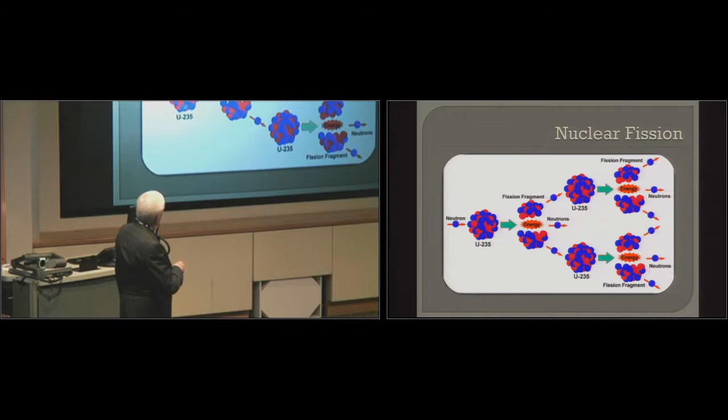And so when you talk about nuclear waste and concerns, some of these fission fragments are radioactive. So when you have a fresh fuel pellet, you can hold it in your hand. It's not a problem. But after it's been in your reactor for about 3 to 4 years, you would not want to hold it in your hand, because some of these fission fragments are radioactive and they have to be handled very carefully. So basically the chain reaction, you start with uranium-235, hit it with a neutron, it splits, that neutron goes off to others, and so the chain reaction is self-sustaining.

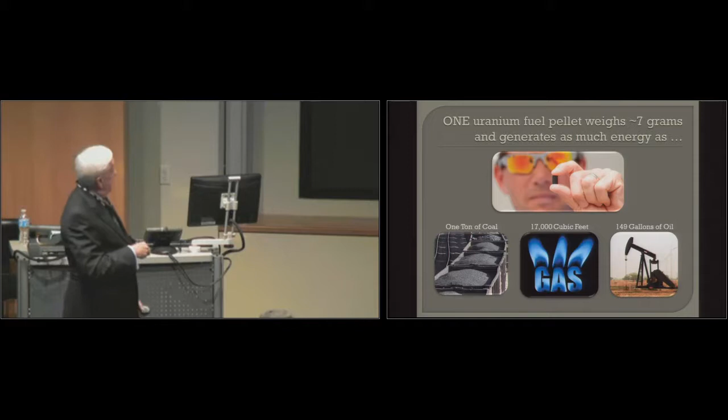So the way this works is you'll take a little fuel pellet, it's about half an inch in height, about half an inch in diameter, ceramic uranium dioxide fuel, enriched to about 3 to 4% uranium-235. And the amount of energy in that little pellet is fairly phenomenal. It's equivalent to a ton of coal, or 17,000 cubic feet of gas, or 149 gallons of oil. So it's a very compact form of energy, very efficient.

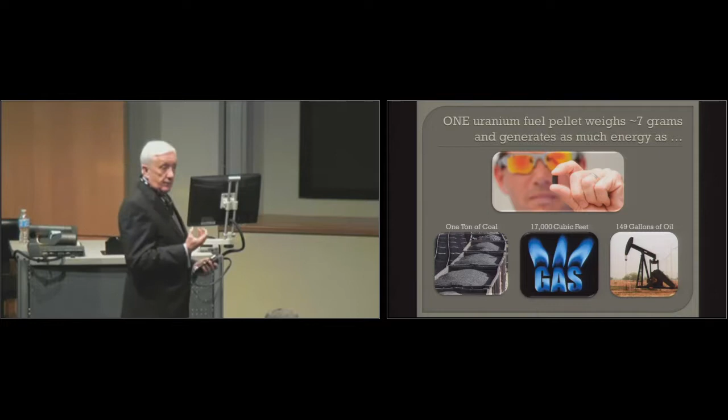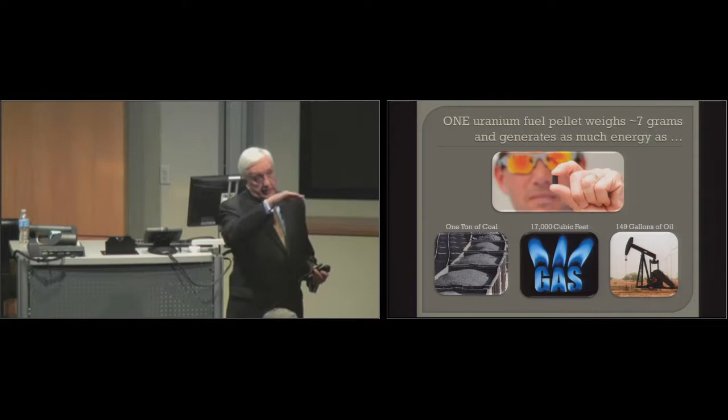Because what you're doing is you're dealing with the nuclear forces rather than if you burn something. If you burn something, whether it's coal, oil, or gas, you're dealing with the electron clouds, and those are weaker. So if you look at forming a CO2 molecule, you'll get roughly 2 electron volts when you form CO2. If you split your friendly atom of uranium, you get 200 mega electron volts. So that means you get 100 million times the amount of energy from that fission reaction than from burning something, because you're dealing with the stronger nuclear forces. So that's why it's such a compact form.

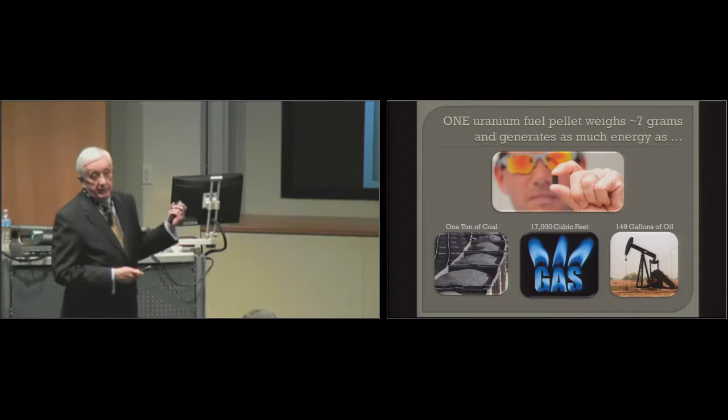Now there's people like Dave and I that think reactors are fun, but you really do it because they're energy efficient, and in general, until we had very cheap natural gas, they were economically advantageous. So I gave a talk a number of years ago in Dallas. That pellet is also equivalent to about 50 gallons of gasoline. And so the student held up his hand and said, well, if I put that little pellet in my car, can I drive it around? It doesn't work that way. You've got to go through a conversion process.

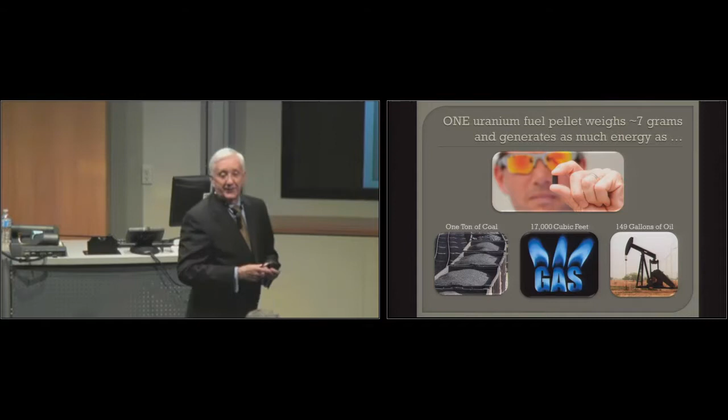So these little pellets just simply stack up in a long rod, and this rod then goes into what's called the fuel bundle. So during the fissioning process, this pellet gets hot because of the slowing down of the fission fragments and converting mass into energy. This rod gets hot, and so all you do is you flow water by it, and the water gets hot. So all a nuclear reactor does is makes hot water. It makes a lot of hot water.

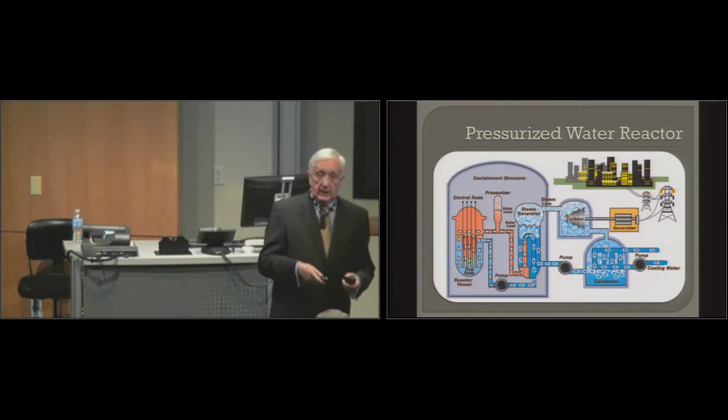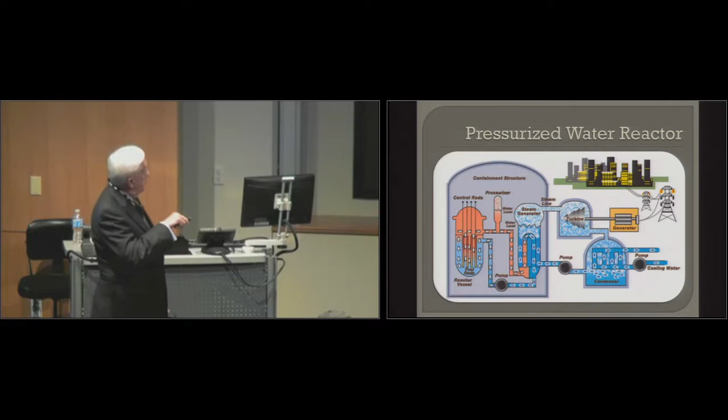And so we typically have 2 different kinds of reactors in the world. The main one is called the pressurized water reactor. And this really spun out of the Navy nuclear program. That's why it sort of started a little bit faster than the boiling water reactor. So in the United States, 2/3 of our reactors are pressurized water reactors. And this reactor has 3 distinct loops affiliated with it. So in this area, the primary loop stays liquid all the time.

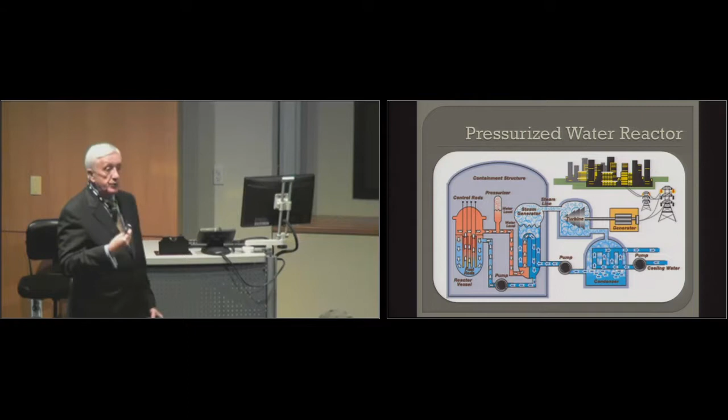And so the water goes by the rods, it gets hot, it comes out, it goes through a steam generator, and in this second loop is where you turn water into steam, and then that steam then goes through a turbine. So you'll have 3 different loops. So the water that stays here all the time, it just goes around and around. Then you'll have the secondary steam loop, and that water is closed, goes around and around.

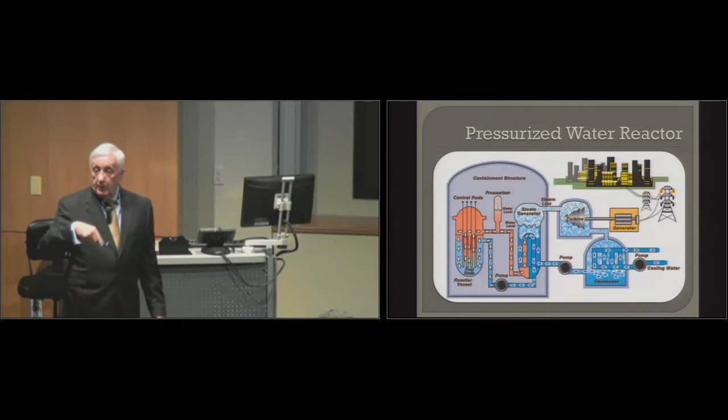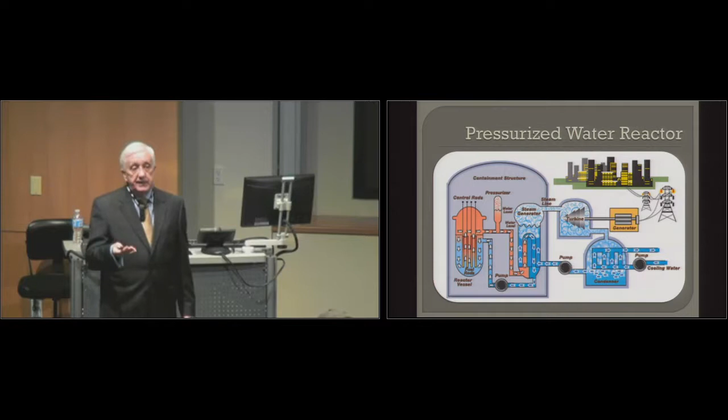And then your third loop is the cooling water. So you'll either have a cooling tower, a lake, a river, or something like that condenses that steam back into liquid and it circulates around. So it's a very basic type of reactor, and that really came out of the nuclear Navy program and was commercialized. The other kind of reactor is a boiling water reactor, and this is the kind that was at Fukushima.

And it doesn't mean that boiling water reactors are inherently unsafe. It just means that this particular reactor at Fukushima was a boiling water reactor. In this one, you only have 2 loops. The vessel is taller, and so you'll actually make steam at the top. You'll have steam separators, so the water droplets are filtered out, and that steam then goes through the turbine. Again, it's condensed down and comes back in.

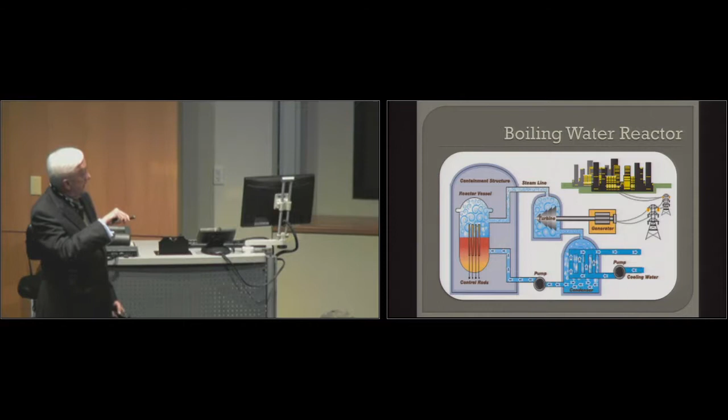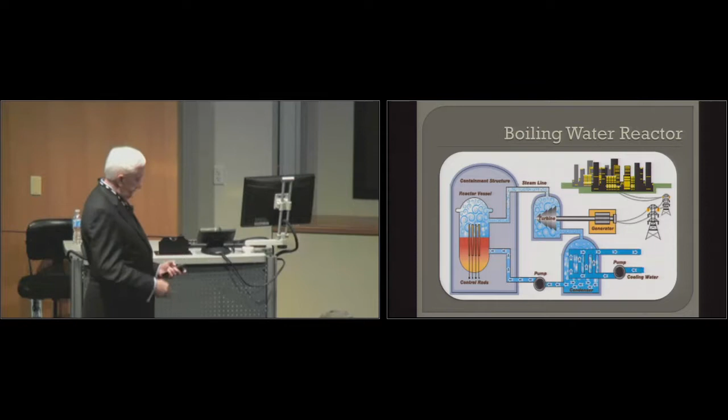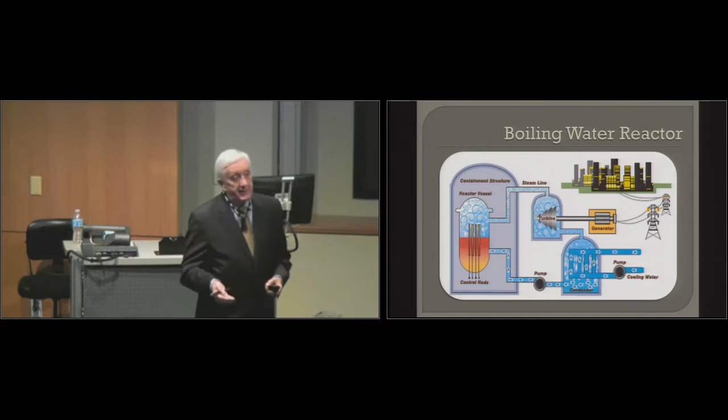So that one will be a 2-loop plant versus a 3-loop plant, but you'll actually convert the steam inside of it. The vessel is about twice as high as in a pressurized water reactor, but they're essentially the same concept. Some people would say which one was better. I used to say, well, it's like a Ford or a Chevrolet. Would you rather have a Ford or a Chevrolet? So, they're similar. Now you have to say a Mercedes or a BMW because the costs have gone up so high. So we have to use a different analogy now.

So if you look at around the world and you say, well, why would anyone want to build a nuclear plant? And usually there's a variety of reasons. One is diversity. You don't want to have all your electricity from a single source, no matter what that source is, whether it's gas, whether it's coal, whether it's oil, whether it's nuclear, whether it's hydro. You want energy diversity. The other thing is they build nuclear plants because they are sustainable.

There are tons and tons of uranium around. So if we took all the uranium that we know today, you could run all the nuclear plants for their entire lifetime with no problem. And that's at a very low uranium cost. If the uranium cost goes up, then your supply goes up. So it's very sustainable. In addition, you could also build a breeder reactor where you actually make fuel as you burn the fuel.

So if you look at the fission from a uranium-235, you get, on average, 2.5 neutrons. That doesn't mean that you have a half a neutron. Sometimes you have 2, sometimes you have 3. You only need one of those to keep that chain reaction going. So you could take that other, on average, 1.5 neutrons, and you can convert a fertile fuel to a fissile fuel. And that could be either thorium or uranium-238 to make plutonium.

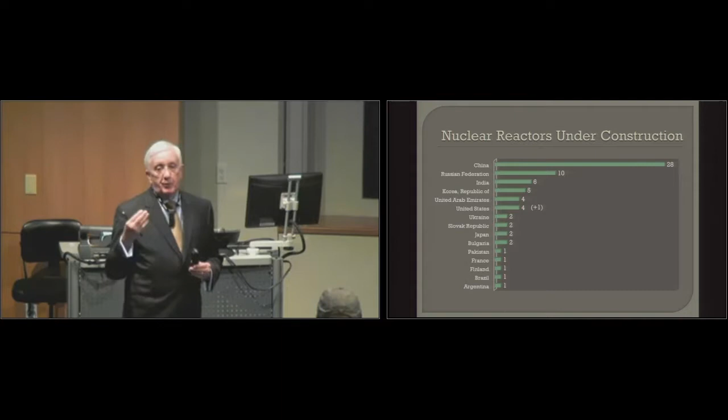What about the AP1000s that the Chinese are building? That's going to be interesting. I don't know the financials. The question was, what about the 4 AP1000s that China is building? So China has an agreement with Westinghouse to build 4 with an option for another 4, so they're going to be building 8 in reality. Now, the thing that was interesting, when that contract was done, everyone knew that the intellectual property rights would be borrowed by the Chinese over time.

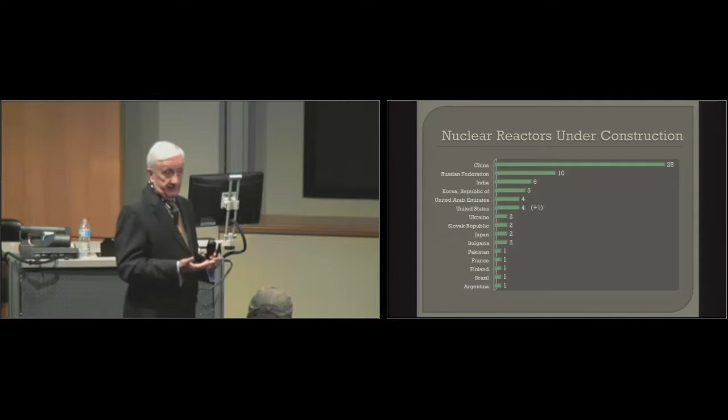So the Chinese now plan to do a CP 1400. They want to kick the megawatts up from roughly 1,000 to 1,400 megawatts; it's actually a little higher than that. But what's interesting is Westinghouse first designed the AP 600, which is passively safe, which means if your pumps shut off and you lose all kinds of power, it's not going to melt. The margin of economics was borderline, so they kicked it up to 1,000. They reduced their safety margin, but it's still passively safe.

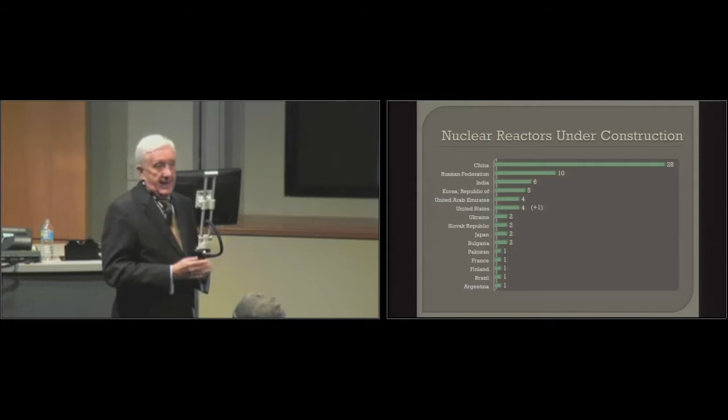The CP 1400 is no way going to be passively safe. They will have to have active systems. So they will make a CP 1400, but it will not be passively safe. It's not clear what kind of impact that will have on China, other than the fact that somebody will end up buying Westinghouse. It's just a matter of who and how: the intellectual property, the systems engineering, the basic designs, and the property rights. So we will have to see how that plays out.

So the rumor is by the end of the month, Westinghouse may or may not declare bankruptcy. It's all unknown at the current time. As David indicated, I'm on the board of the Southern Company.

And so they're the ones that are building the two in the state of Georgia by Georgia Power. So I've been on a phone call about once a week on what we think is happening with the bankruptcy situation, because it will be an impact and it's not likely to be positive no matter what happens.

So if you go down the list, you can see Japan actually had 2 reactors that were under construction. They're really stopped, but they may kick up again as they look at their demand. But the big one that's out there that is building the most plants right now is in China.

So if you're going to go out and build a reactor today in the U.S., what's different today than it was in the 70s when we were the ones that were building 28 reactors? A couple of things that happened was that in the old days, you had a 2-step process. You had to do a construction permit. Then after you built it, you would have to come back to the Nuclear Regulatory Commission for a mother may I. And so after you spent $5 billion on a reactor, you'd have to come back to the regulator and say, please may I now operate it.

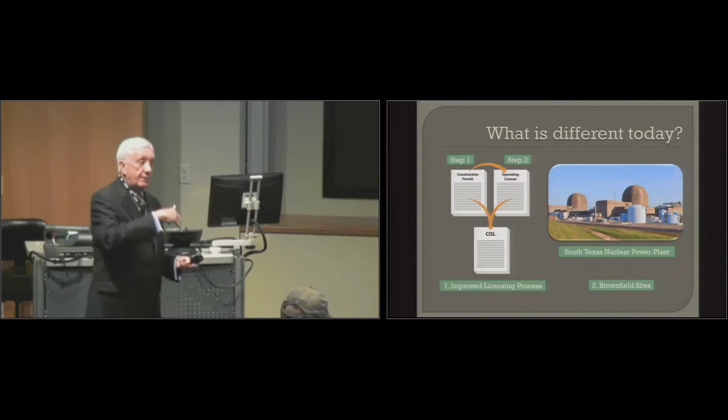So what happened in the early 90s, the regulator and the industry got together and said, is there a way we can do it without compromising safety? And they came up with a process called a combined operating license. So you basically come up with a certified design that the Nuclear Regulatory Commission approves, and then if you build it like it is designed with inspections, then you can operate it without coming back and getting thrown into courts. And so that is a big change.

It turns out the first application for a combined operating license occurred in Texas. The South Texas Project was going to add 2 reactors at their site. And so they were the first application received while I was chairman, so they gave me a leather-bound, actually it was on a CD, but they gave it in a little leather-bound book just so I could have one for a souvenir.

The other thing that happened, most of the plants that were being discussed when I was at the Nuclear Regulatory Commission were at brownfield sites. So they were existing sites. If you look at the South Texas site, it was designed for 4 reactors, but they only built 2. Comanche Peak near Dallas-Fort Worth was designed for 4. They only built 2. So almost all the applications we had were at brownfield sites.

The other thing the Nuclear Regulatory Commission did was they would let a utility bank a site. So what you can do is you can come in and do an early site permit. You don't have to even specify the kind of reactor, but you define the parameters, and you could build either a boiling water reactor or a pressurized water reactor that NRC had certified, and you could get an early site permit that was good for 20 years. So you can bank that site if you want to come back and build later. So several utilities have done that and are doing it.

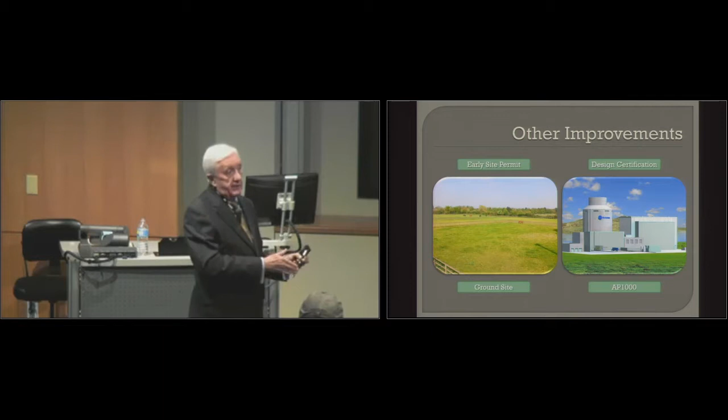But the big difference in this is having a certified design, a standardized plant, and that's where France did a lot better than the United States. They had one utility that was government-owned. They had one vendor that designed the reactors, government-owned. So they could force a standardization. So what they would do is they would freeze the design for 5 to 10 years, and then they would come out with a new model. So they would make all the improvements in batches rather than in the United States.

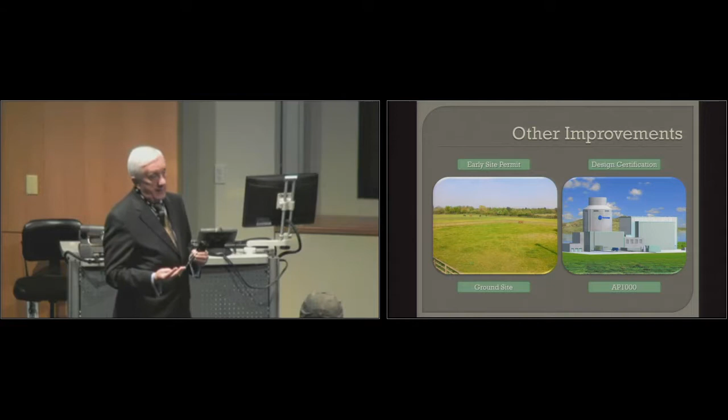We at one time had 104 plants running, and we had 104 different ones. Even at a site like Palo Verde that has 3 reactors at one site, they're all slightly different.

So now let's move to the interesting area of Fukushima.

May I ask a question about licensing? I was wondering if you could speak about the Nuclear Energy Innovation and Modernization Act, that further restructures the NRC's licensing process with the assumption of making it more efficient for advanced reactor designs. How do you anticipate that?

That's a great question. One thing I learned while I was chairman of the NRC: I had 535 advisors - 435 in the House and 100 in the Senate. So you learn you have a lot of input, whether you want it or not. The good news is the Nuclear Regulatory Commission is an independent agency. I was at the Pentagon for 5 years before I went to the NRC, and there I was in the executive branch, so I would often be in White House meetings representing the Secretary of Energy or Secretary of Defense. But at the NRC, I was never at those meetings because I was not part of the executive branch. So it's an independent agency, but with congressional oversight. That's the difference.

So this Congress Act that's coming through is really directed more to new reactors. The Nuclear Regulatory Commission is very well equipped to handle and analyze light water reactors - that's all the pressurized water reactors, boiling water reactors. But if someone comes in with a liquid metal reactor, they haven't looked at it, and they may or may not have the technical expertise to really do it. So this is an attempt to let them get technical expertise to look at these advanced reactors. It's a positive step.

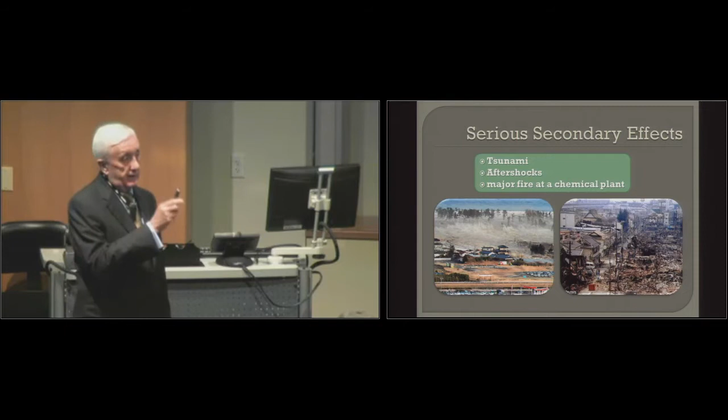And all up and down that coast, villages were just gone. The pictures of before and after are just absolutely stunning. But the force of that water is just amazing. You look at this area here, it looks like a nuclear bomb went off. The devastation was stunning.

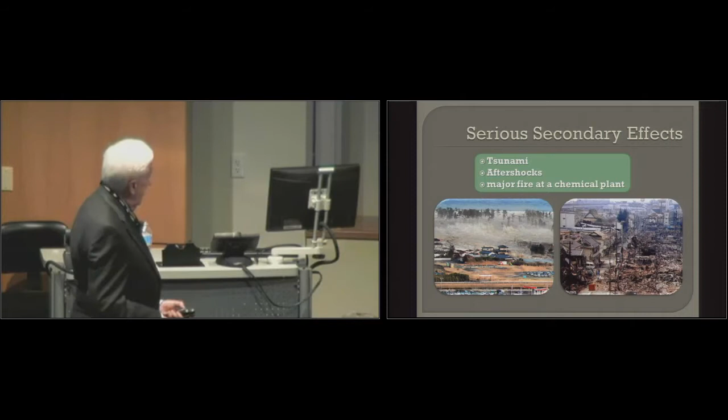And you look at the water flow, the bridges that used to be there, the roads. This was a picture of a chemical plant that burned for two weeks, killed about 34 people from the releases.

The other thing that's interesting is people always talk about radiation. People are just afraid of radiation, that's the bottom line. You can't see it, smell it, taste it, so your fears kick in. But no one talks about that tsunami pushing all these chemicals inland. Nobody talks about that, but they'll worry about the radiation because it's just perceived as different.

You look at the cars, tossed around just like toys. I saw a video of the tsunami coming in, the water, and there was a traffic jam. An individual had a camera on the front of their car, so they recorded all this. They're stuck in traffic, and all of a sudden you see these semis going backwards, floating, being carried away, and then this car the driver was in started floating and moved around, and the driver fortunately survived. The amount of destructive force from that water was just amazing.

The other thing that's amazing is this is Fukushima. These were the exhaust stacks. Even though the earthquake was eight times greater than design, these stacks remained intact, which was phenomenal, the fact that they remained up. At one of the plants there was a person working on one of these towers who was killed because it swayed three feet one way, three feet the other way, and injured his head. They couldn't get up to save him, which was unfortunate.

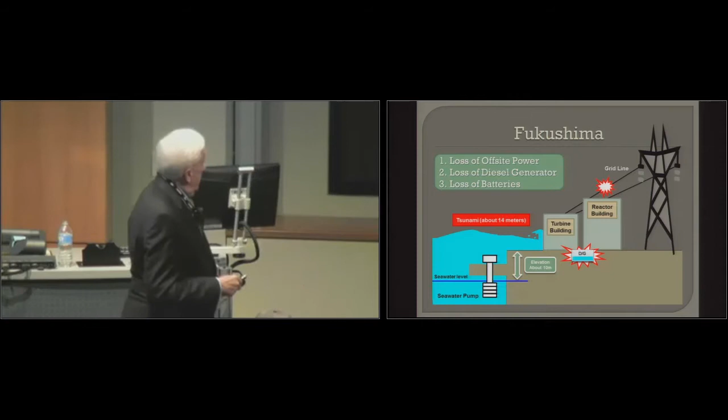Their battery compartments were not watertight. In the United States, ours have been watertight since the 80s. The reason the United States required that was they thought you might have an internal pipe break and could flood your battery compartment from internal flooding. So all of our United States battery compartments have been watertight. If you look at this situation, if your reactor is running at full power and you lose your offsite power, you lose your diesels, and you lose your batteries, you are going to melt fuel. I mean, just calculate those numbers and that's what's going to happen.

So this tsunami that came roaring in, they had thought that the maximum was going to be about 6.5 meters, 6.7, but it ended up being 14, and it just rolled right through that whole facility.

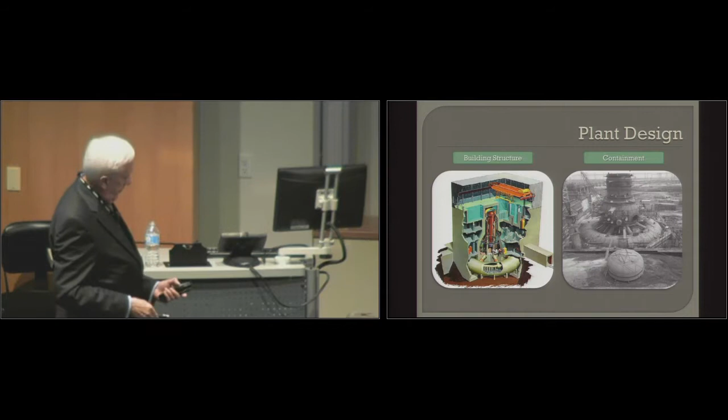So this area up here, this material is really to protect the workers and the facilities from harsh weather, rain, snow, so you can work under a variety of conditions. This is not a containment area up here. The containment is this thick concrete structure. So this is all that support structure above the reactor. The reactor is below this concrete area.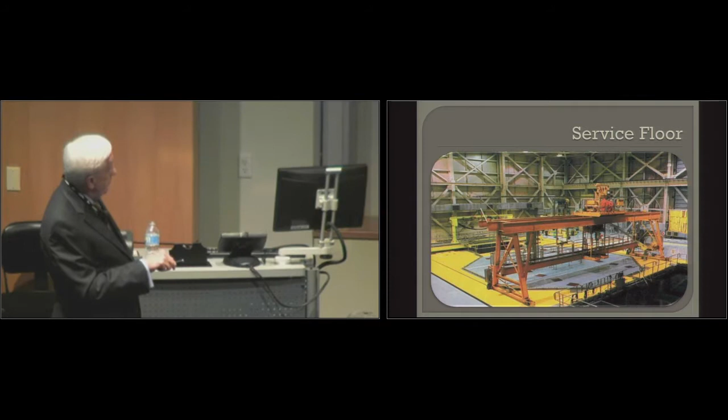When your reactor is running at full power, you can actually walk on the top of this because there's very heavy shielding, so you don't have to cross your legs and protect your vital organs or anything like that. It's a safe environment, there's no real radiation in this area. And so I'll show you in a minute what happened to that containment, both the containment area here and the structure up here.

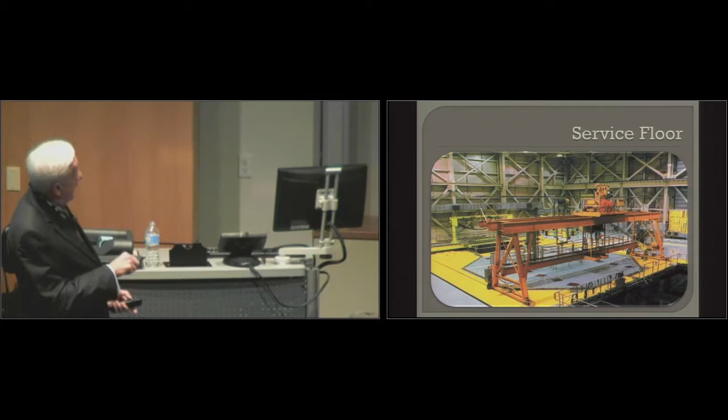So what happened in the accident is you have your reactor core, all those fuel rods and fuel assemblies. They're hot. Normally water is flowing by them. If the water stops, they're going to melt. For a while they were boiling and water was moving by here, but once they start melting, you have two reactions. One is that cladding around the fuel pellet, which is made of zirconium.

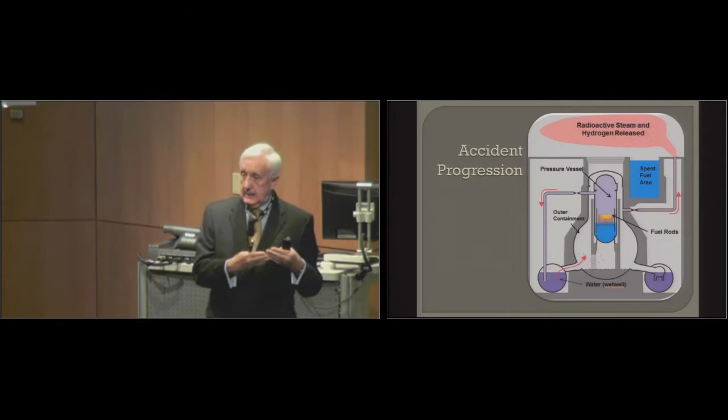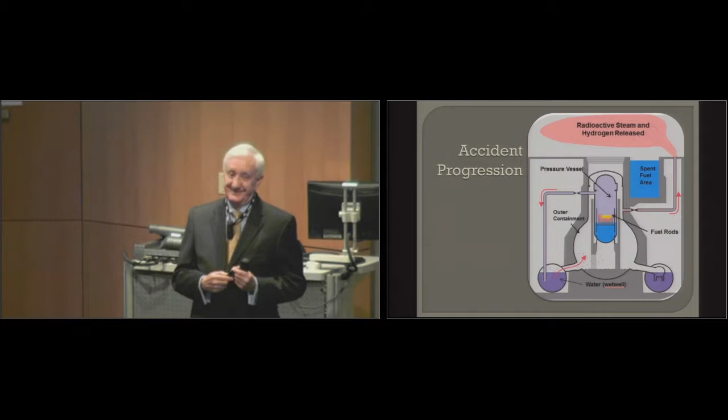There's a reaction where if zircaloy is hit with steam it will make zirconium oxide. So from your chemistry, if you snarf off the oxygen from water, what do you have left? Hydrogen. I'll show you what happened in a minute from that hydrogen.

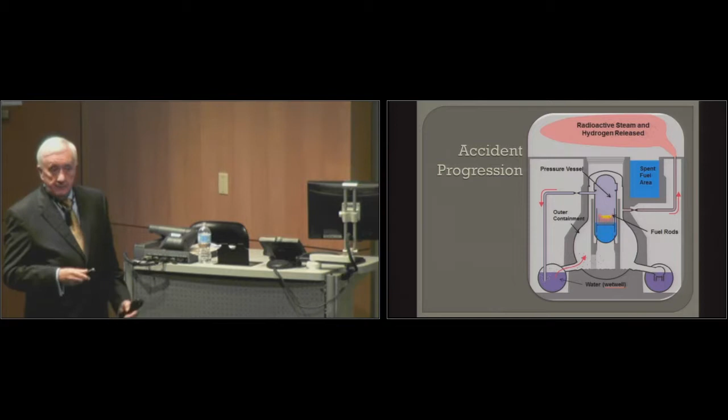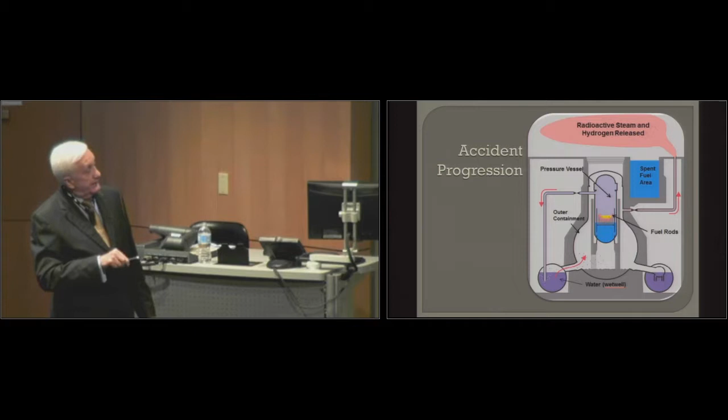Basically what happened was, in general, this area is vented, but because they lost all their power, including batteries, they couldn't open the valves to vent this facility. So as this melting occurred, your hydrogen and radioactive elements came up above that reactor where I said you could normally stand. You wouldn't want to be standing there because this is a very contaminated area now, since they weren't able to vent through filtration like they should have. But their valves, they couldn't open them. They were so big, they had no way of opening them without power.

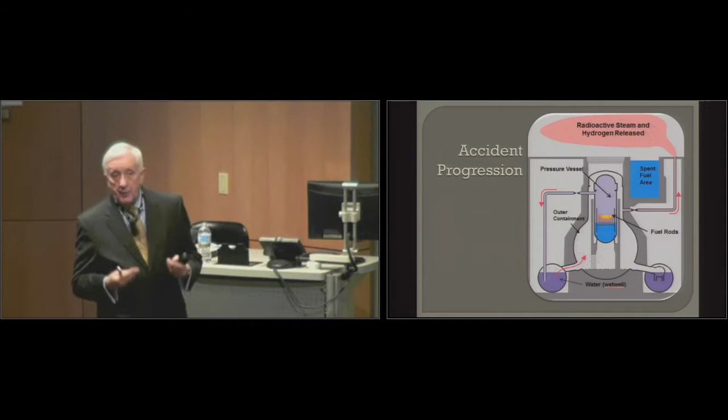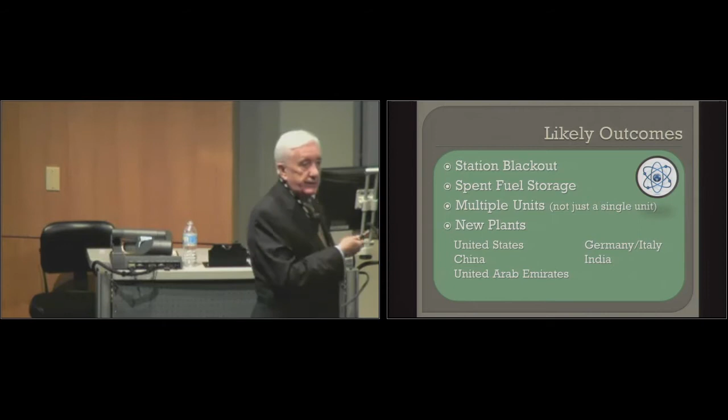So basically, station blackout is something that everybody around the world is looking at. How do you address station blackout, when you lose all your power like they did? They lost on-site, off-site, diesels, batteries. So how do you do that? The other thing is, because of the perception of whether the spent fuel pool drained in Unit 4 or not, they now actually have water measurements, so you can tell if there's water in there or not. Like, duh, why wouldn't you have done it before? So things are pretty obvious after things happen.

The other thing is, in general, if you have a 2-unit site in the United States, you assume that only one reactor has an accident at a time. Now they're saying, what would you do if you had a problem with both? So multiple units. For new plants, the United States was in pretty good shape. They went back and looked at some earthquake issues, but for the most part, not a lot.

China looked at it for about a week and said, yeah, we're good to go. They need the power. They're like France, no choice. United Arab Emirates, we took a team over to Japan, talked to people, looked at things, and we did elevate that plant. It's on the Persian Gulf or the Arabian Sea, depending on which way you want to call it, not a high tsunami area, to say the least, but just to make it safe, they elevated it.

Germany determined to shut down their plants before they even knew what happened. That's called politics. Merkel needed the Greens to form her coalition. Italy was about to start their nuclear program. They changed governments about every other day, so it was not a surprise that they would stop. India is going to also have to add more nuclear plants, but they will also look at safety enhancements as well. So with that, see what other questions you might have.